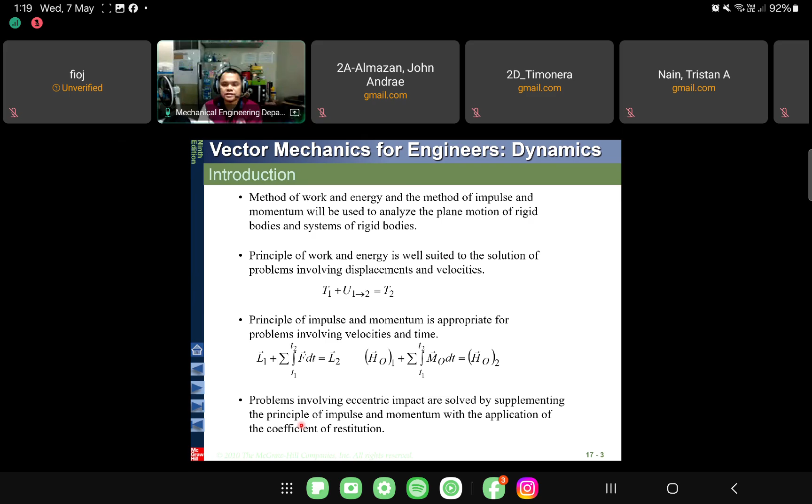So let's start with the principle of work and energy for a rigid body. It is well adapted to problems involving velocities and displacements, as I mentioned before. The main advantage is that you can isolate your work and kinetic energy since these are scalar quantities, to solve for your velocity as well as your displacements.

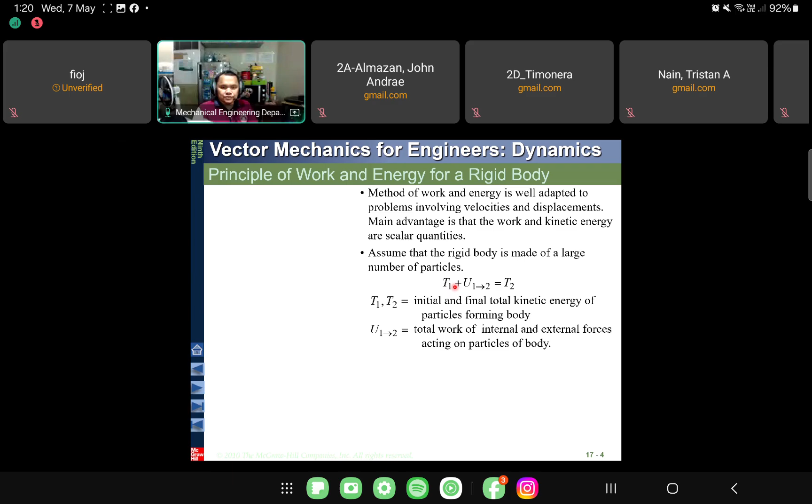So let's take for example, we assume that the rigid body is made up of a large number of particles. That is the concept of your rigid body, it's made of a large number of particles. Now, your principle of work and energy: your initial kinetic energy plus your work from point one to point two is equal to your final total kinetic energy. Let's assume this one.

How about what are the different forces to be considered? In this case for your rigid body, it is the internal and external forces acting on particles of the body. Let's talk about the internal forces. The internal forces between particles A and B are equal and opposite, as shown here.

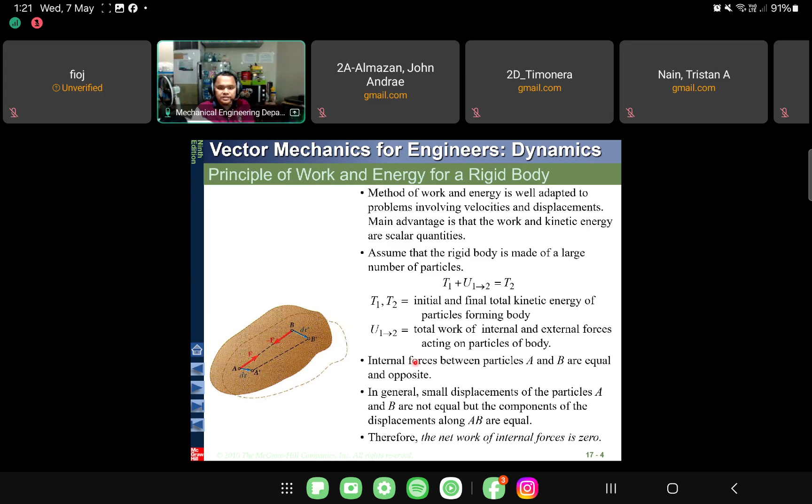So that means, in general, small displacements of particles A and B are not equal, but the components of the displacements along AB are equal. Based on this, we can say that the net work of internal forces is zero for the different particles in your rigid body. That's why when we are considering the principle of work and energy, we focus on the total work of the external forces acting on particles of the body. The net work of internal forces is zero based on these arguments.

Then let's talk about the work of forces acting on a rigid body. We have F times your distance from point one to point two. So we consider the net work of two forces and their moment during a displacement of their points of application. For example, you have this F and negative F, and the moment during this. This gives us work equal to F times dr1, this distance, minus negative F times dr1, plus F times dr2, this dr2 distance.

So summation of this gives us zero. We have F dr2, or equal to ds2. We have F r d theta. This gives us F r is your moment. So this means that the work from 1 to 2 is equal to M times theta 2 minus theta 1, where M here is your moment.

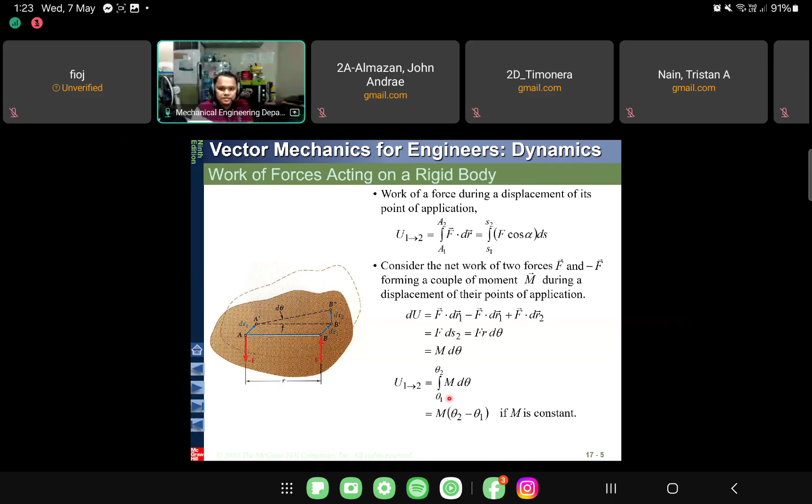Then how about forces acting on rigid bodies which do no work? Similar to particles, these applied forces do not do work either. First is forces applied to fixed points, so reactions at a frictionless pin when the supported body rotates about the pin — the work here is zero.

Then we all know forces acting in a direction perpendicular to the displacement. If your motion is going to the left, then the force acting is perpendicular, going upwards, that's 90 degrees. So that force does zero work on the system.

Other examples: reaction at a frictionless surface to a body moving along the surface. That's the reaction. Let's say for example there's a plane there with a roller support, so the reaction at your roller support is on the y-axis, but your motion is going to the left or right. So that reaction doesn't do work on your system. And also the weight of a body when its center of gravity moves horizontally — it's very obvious that your body moves horizontally but your weight is always vertical, going downwards, so that weight does no work on your system.

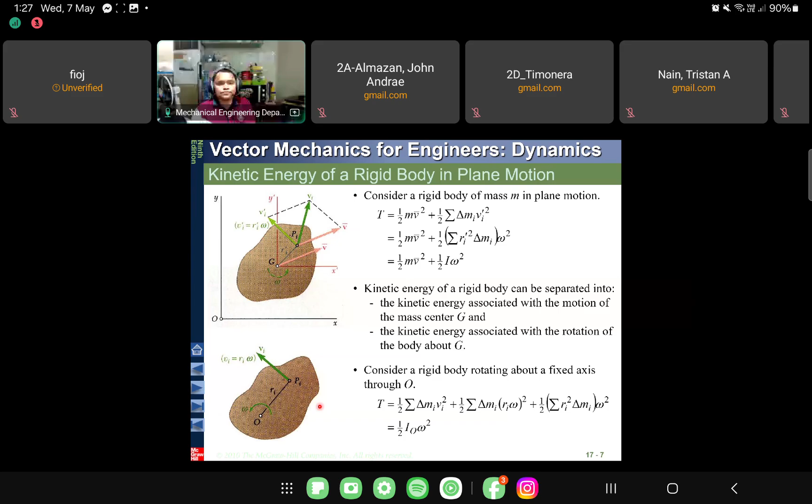Next, for systems of rigid bodies: when we are faced with problems involving systems consisting of several rigid bodies, we can apply the principle of work and energy to each body, and also to the entire system, the principle of work and energy.

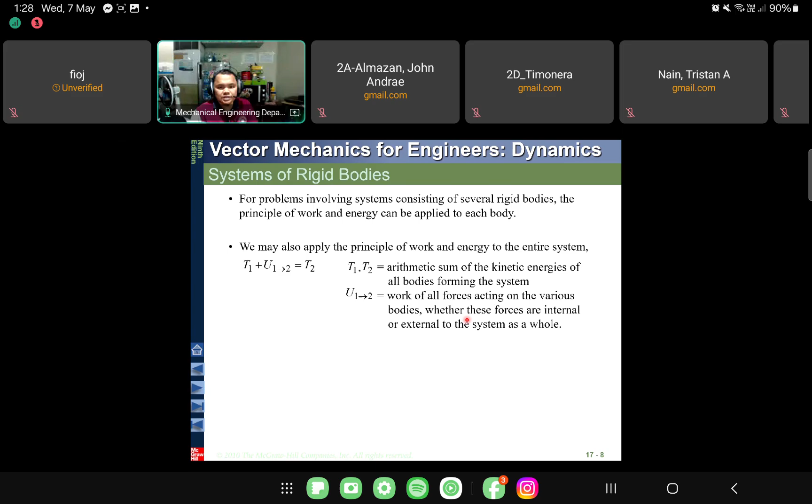So how are we going to do this? We have: kinetic energy initial plus work from 1 to 2 is equal to the final. T1 and T2 are the arithmetic sum of the kinetic energies of all bodies forming the system. For work from 1 to 2, this is the work of all forces acting on the various bodies, whether internal or external to the system as a whole. So this is now considered as a whole.

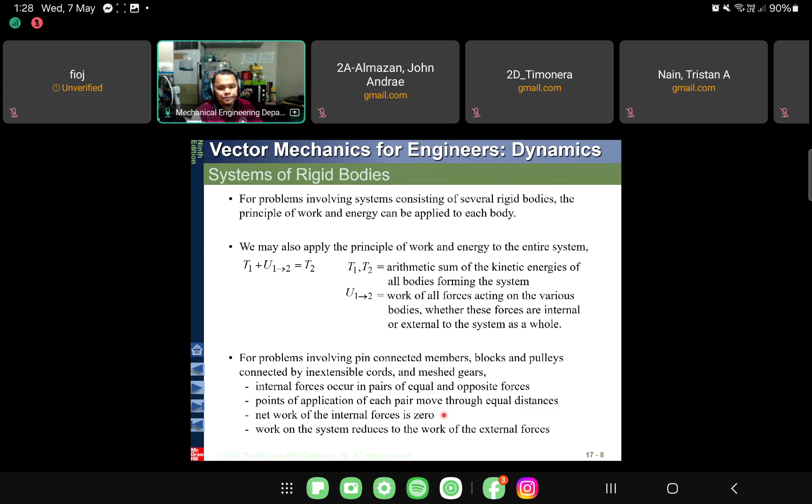For problems involving pin-connected members, blocks and pulleys connected by inextensible cords, and meshed gears, the internal forces occur in pairs of equal and opposite forces, similar to what you learned in statics. The points of application of each pair move through equal distances, so the net work of the internal forces is zero. Thus the work on the system reduces to the work of the external forces.

So how can we apply the conservation of energy to rigid bodies? This gives us: initial kinetic plus initial potential is equal to final kinetic plus final potential energy.

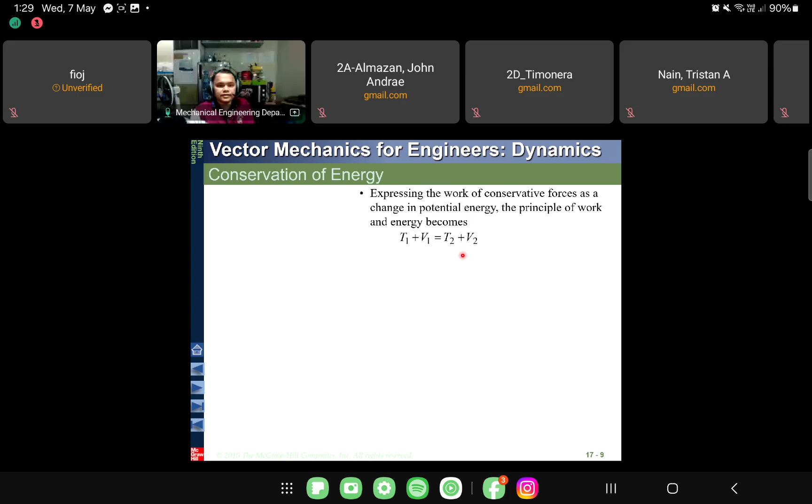Let's consider the slender rod of mass m, supported at A and B, with mass m and center of gravity G, with a certain length L. The motion is: B goes downward while A moves to the left. That's why you have the linear velocity of the rod going here, while the angular velocity will be here.

So let's try to determine the angular velocity as a function of the angle theta. T1 is equal to 0 for this, since it starts from rest, and our datum line is here, so our potential energy is 0.

So T2, what is your T2 here? The kinetic energy at this point, down below. Wait a moment. Listen to me. You dropped this. Are you still alive there? Yes, sir. Yes, sir.

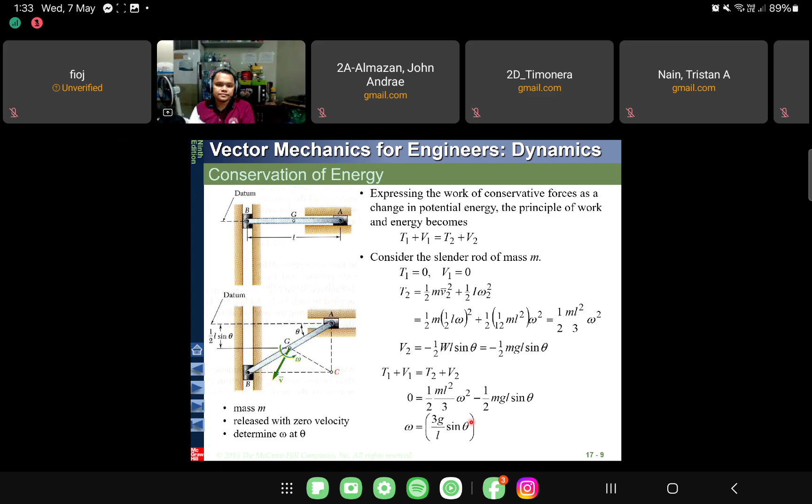Going back to the conservation of energy principle, you have T1 plus V1 equals T2 plus V2. These are zero. So we substitute T2 and V2, which gives us the angular velocity in terms of theta: angular velocity squared is equal to 3g over L sine theta.

Last concept: power. Power is the rate at which work is done. For a body acted upon by force F and moving with velocity, you have force times velocity.

For a rigid body rotating with an angular velocity and acted upon by a couple of moment M parallel to the axis of rotation, your power can be expressed in terms of your moment times your angular velocity.

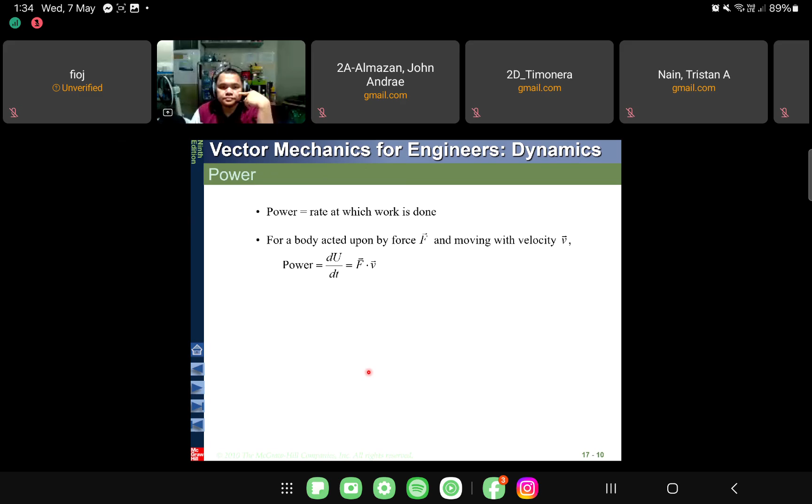Let's proceed to the sample problems. Here we have a drum and a flywheel setup. The moment of inertia for the system is 10.5 pound-feet second squared, the radius is 1.25 feet, and the weight of the block is 240 pounds.

The bearing friction is equivalent to a couple of 60 pound-feet. At the instant shown, the block is moving downward at 6 feet per second. The question is to determine the velocity of the block after it has moved 4 feet downward.

Considering the system of the flywheel and block, the work done by the internal forces exerted by the cable cancels, so the net work of the internal forces is zero. The velocity of the block and the angular velocity can be related by this relation: your linear velocity is equal to r times your angular velocity.

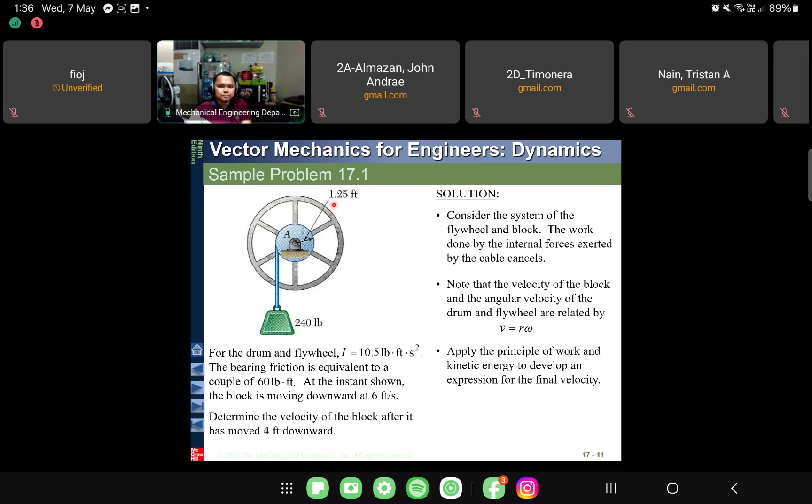Express already the different parameters in your diagram: you have your weight here, your acceleration for your flywheel both in the x and y, and you have your moment here.

So we have V1 at 6 feet per second, then we are solving for V2. It's better here since we are talking about changes in the system, that's why you need to give the diagram of the initial state for comparison, and also the diagram of the final state, so that solving becomes easier.

Okay, so let's look at what we're looking for. We are looking here for the final velocity after the block moves down by 4 feet. So this is the diagram I'll be looking for in your solutions.

So velocity of the block and the angular velocity of the drum, we have this relation. Your linear velocity is equal to r times your angular velocity, which gives us your angular velocity is 6 over r which is 1.25. Your angular velocity is 4.80 rad per second.

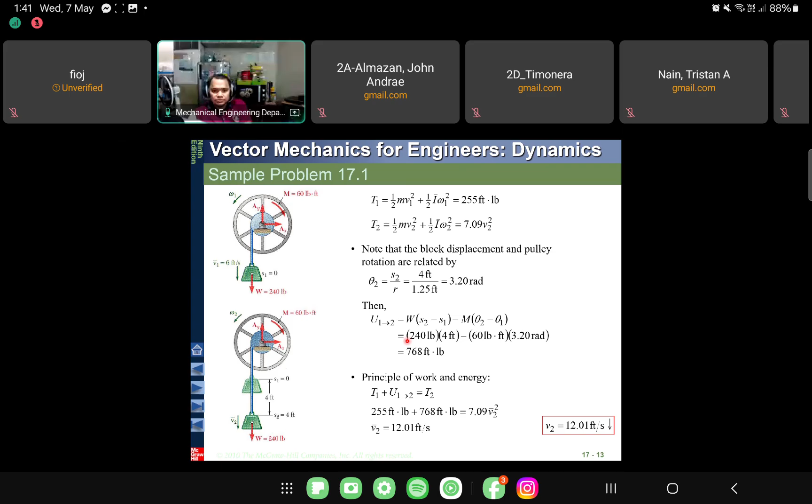So that's how you isolate it. What you're looking for in the problem is the velocity, the final velocity. So you need to isolate your kinetic energy. You can express your kinetic energy in terms of your final velocity, which is this one.

Any question? So far, none yet. Okay, sir.

Okay, so let's proceed to another sample problem. So you have here two gears, gear A and gear B. This system is at rest when a moment of m equal to 6 Newton meter is applied to gear B.

So the question: neglecting friction, determine the number of revolutions of gear B before its angular velocity reaches 600 RPM, and the tangential force exerted by gear B on gear A.

Okay, so take note, for the number of revolutions, you can use your angular velocity to solve for your number of revolutions. Then for the tangential force, you can apply work-energy and isolate your work to get your tangential force.

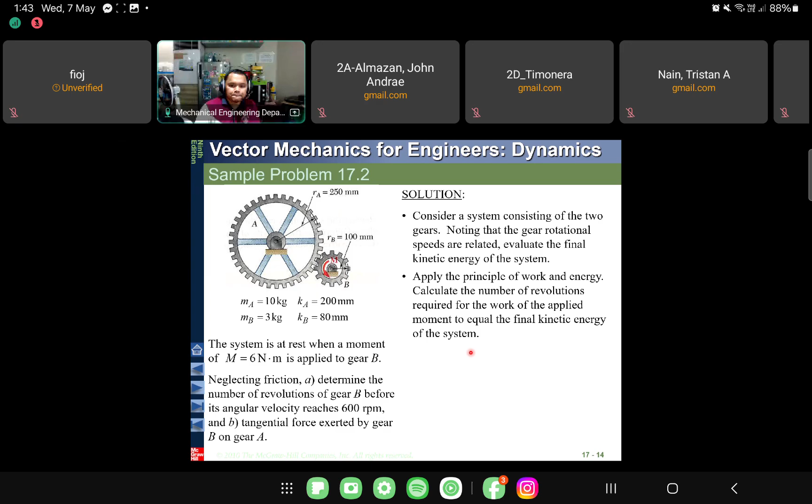So gear rotational speeds are related. Evaluate the final kinetic energy of the system. Then we apply the principle of work and energy. Okay, so this is your diagram, this is just a simple one.

You have your angular velocity for B and your angular velocity for A. Since your B is moving counterclockwise, then your A here is moving rotating clockwise.

Solving for your angular velocity for B, since we want it before it reaches 600 RPM, we use 600 RPM times 2 pi rad per revolution over 60 seconds per minute. This gives us 62.8 rad per second.

And your A, that is equivalent to your angular velocity for B times your RB over RA, this is the relation to your radius. So we have angular velocity for A is 25.1 rad per second.

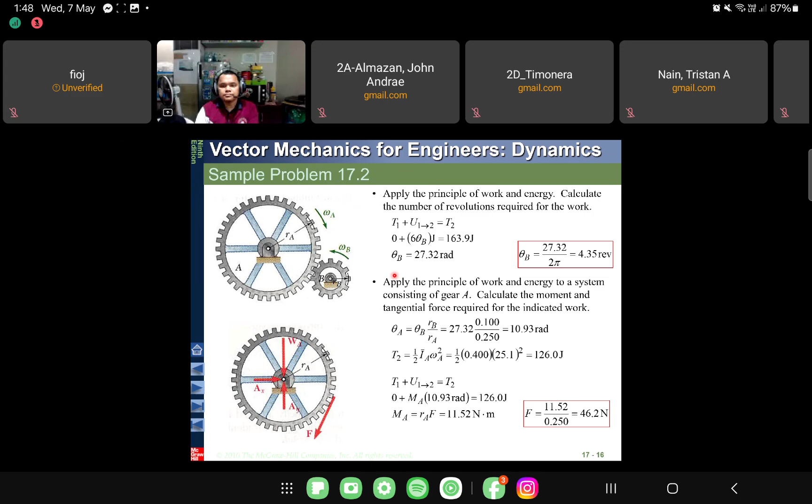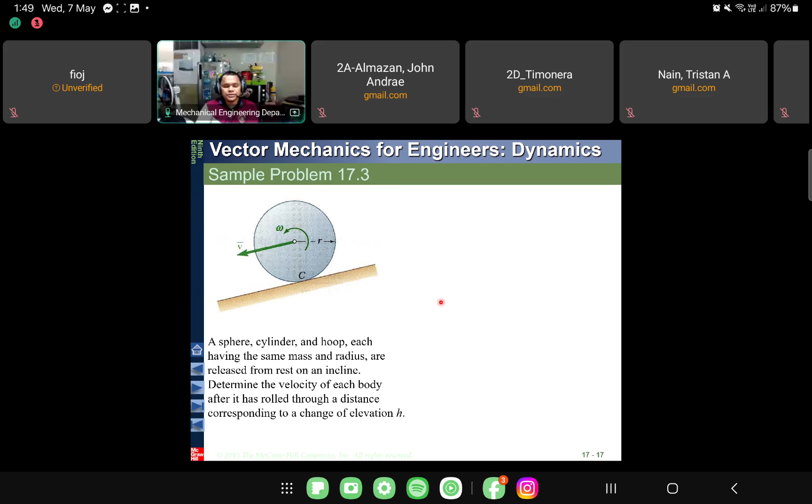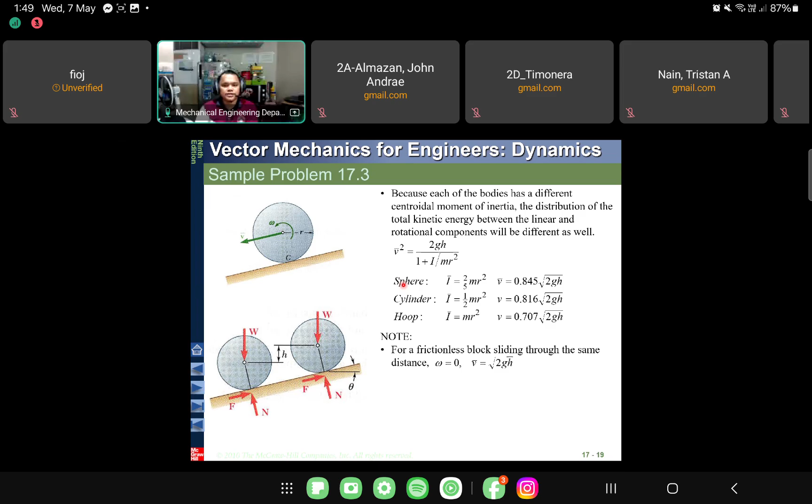We have other problems here. Just try to read these in your book and understand their solutions as well. It's the same concept repeated: principle of work and energy, where your kinetic energy is composed of your center of gravity motion and your rotational motion. Again, don't forget the rotational motion.

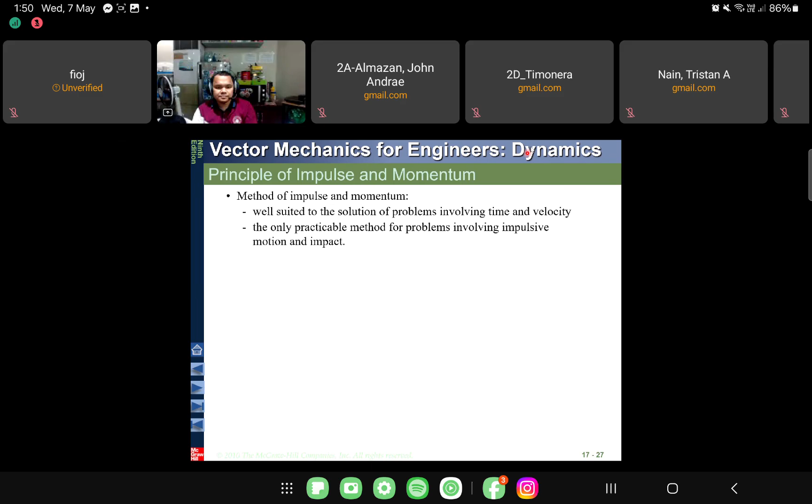So now let's proceed to principle of impulse and momentum. How are we going to apply this to rigid bodies and systems of rigid bodies? As mentioned before, we use the method of impulse and momentum when solving problems involving time and velocity.

Why time? You can isolate your impulse, that is force times time. And velocity lets you isolate your momentum, that is mass times velocity. So this is the only practicable method for problems involving impulsive motion and impact, the method of impulse and momentum.

So what is this principle of impulse and momentum? It says that your initial momentum on your system plus the summation of the impulse on your system is equal to the final momentum of your system. That is your method of impulse and momentum.

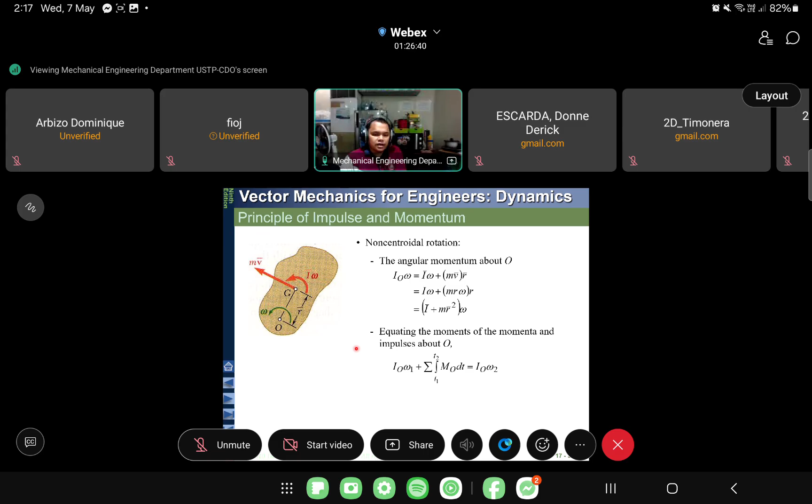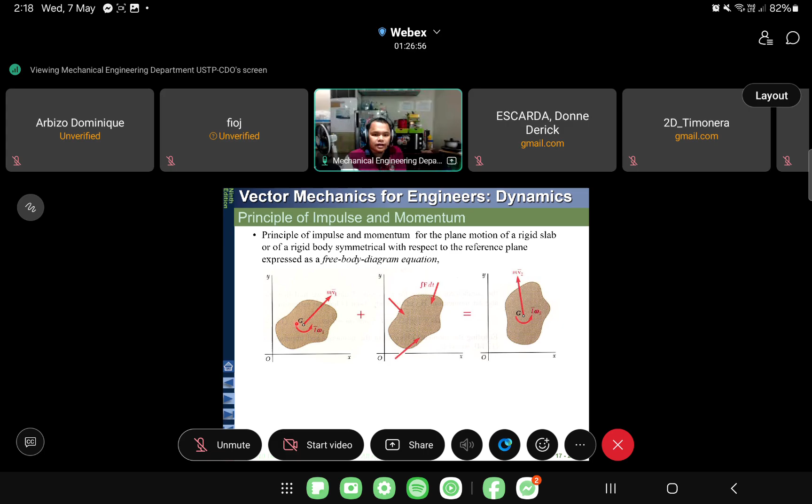So the free body diagram shows your linear velocity - sorry, the mouse lagged. So, linear velocity and your couple. Since it has angular velocity, it's rotating, that's why you have here your couple.

So, this time, a uniform sphere of mass m and radius r is projected along a rough horizontal surface with a linear velocity v1 and no angular velocity. So, the coefficient of kinetic friction is mu k. Determine the time t2 at which the sphere will start rolling without sliding, and the linear and angular velocities of the sphere at time t2.

So, apply the principle of impulse and momentum to find the variation of linear and angular velocities with time. Then, we relate the linear and angular velocities when the sphere stops sliding by noting that the velocity of the point of contact is zero at that instant.

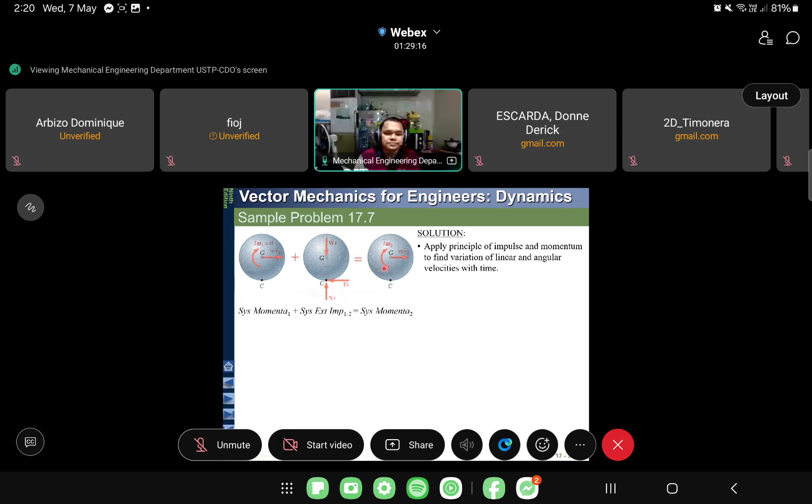Okay, then your impulse. What are the different forces? You have your frictional force, that is your Ft, and you have your normal force, that is your Nt, and the weight of your sphere. Then equal to the final momentum, which can be expressed as linear momentum and your rotational moment couple. Apply y components: Nt minus Wt is equal to 0, so your Nt is equal to Wt. So your normal force is equal to mg.

Summation of x components: mv1 minus Ft is equal to mv2. So Ft, frictional force, can be expressed as mu k times N times t, so mu k N, that is mg times t. Your velocity 2 can cancel out your mass, and can be expressed in terms of v1 minus mu k times gt.

Okay, so moments about G. What are the different forces that have moment about G? You have your Ft, that is Ft times r. This is positive since it will go clockwise. And then equal to positive IW equal to I times angular velocity 2.

Wait, the mouse lagged. So your Ft times r can be expressed as this: mu k times mg, that is your Ft, your frictional force. Then Ft times r, that is equal to your moment of inertia, 2/5 mr squared for your sphere, times your angular velocity 2.

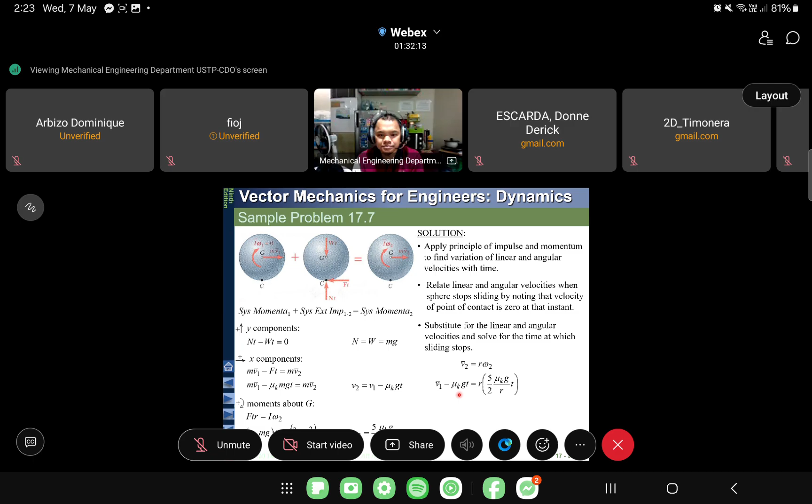Which is 5 over 2 mu k g over r times t. So simplify, this gives us t is equal to 2 over 7 v1 over mu k times g, since you can simplify it in terms of time. So this gives us 2 over 7 v1 over mu k times g. So we have our time as a function of v1.

And next is substitute for the linear and angular velocities, evaluate them at that instant. So at this time, what are the linear and angular velocities? So V2 is equal to V1 minus this, which you were able to solve.

Simplify, that is 5 over 7 V1. Cancel out this one, cancel out this one. So where did this come from? This is V2 minus, from summation of x components, remember V2 is equal to V1 minus mu k times gt.

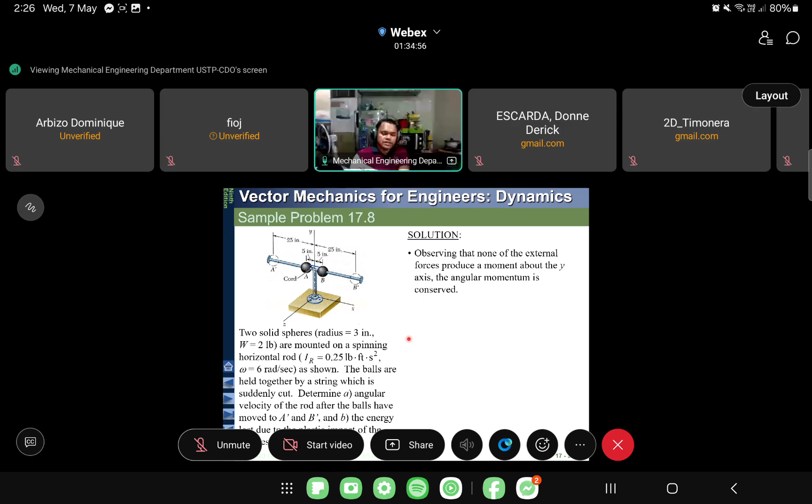Okay, so let's continue. Try to solve this problem on your own. Check this problem in your book. Same thing, just apply the principle of impulse and momentum.

So last topic is on eccentric impact. We already have an understanding of this one in central impact. We are concerned about the period of deformation and period of restitution.

So here we introduce the coefficient of restitution, which is your period of restitution over your period of deformation. Okay, so this can also be expressed as this one.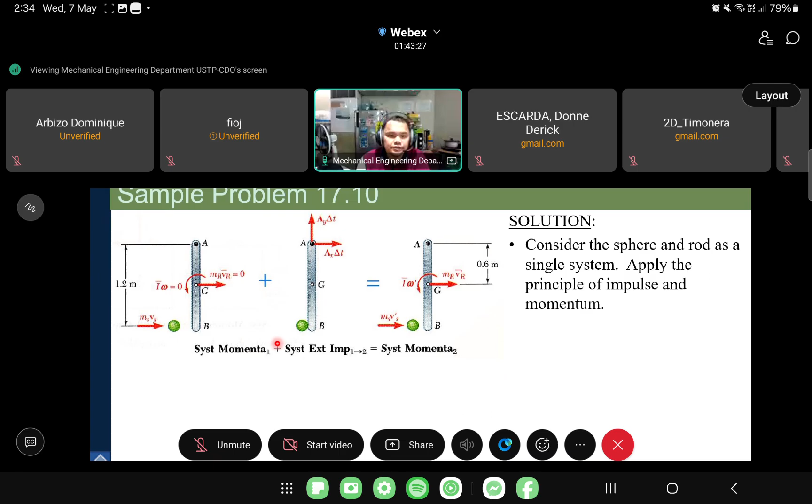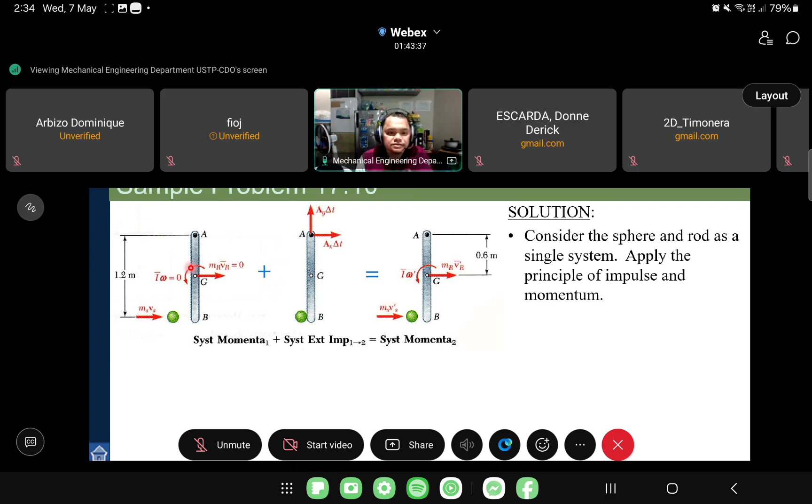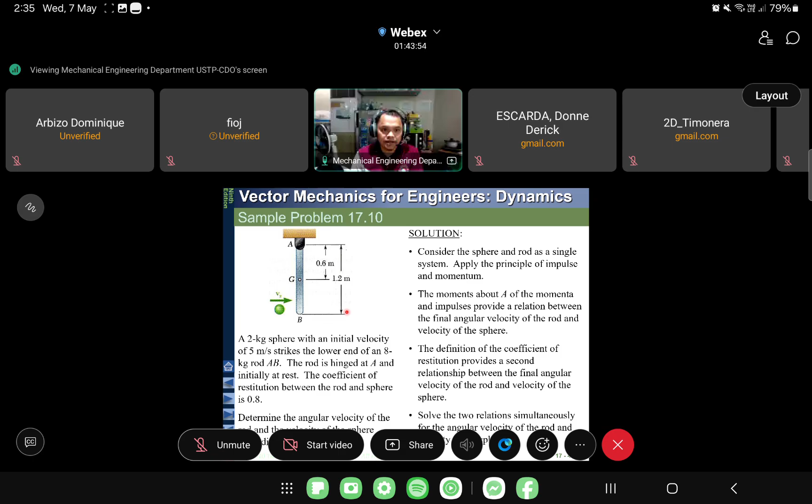So this is your free body diagram. Never forget this free body diagram. We are now considering the system as a single system, your sphere and your rod. So you have your initial system: MS·VS for your sphere, and the rod at rest, so initial momentum and initial moment couple is zero, zero. Plus your system impulse: the force here is your reaction at A, which is pinned, so you have Ax and Ay, times delta t.

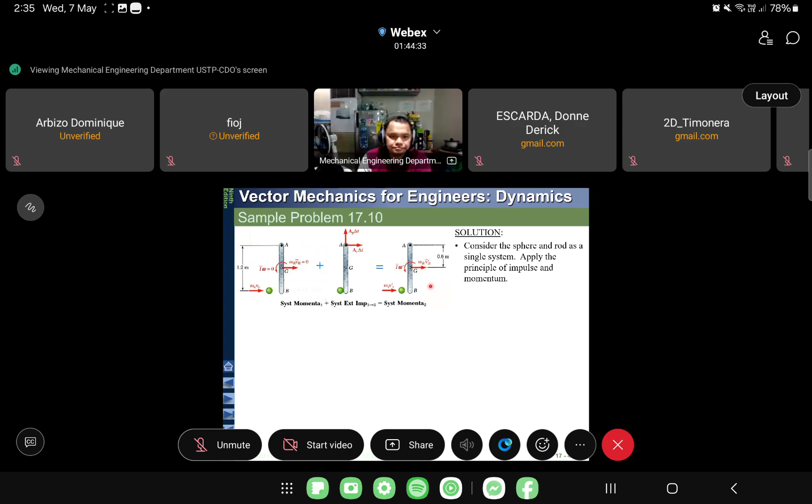And you have here your final, no? You have your MSVS final, then you have your MRVR final, and you have your I final angular velocity.

So moment about A, to cancel AY and AX, you have MSVS times 1.2. This is 0. Then you have MSVS final times 1.2 plus MRVR times 0.6 plus I times W. So here, VR is equal to RW equal to 0.6 meters times W final angular velocity.

Then your I is 1 over 12 ml squared. You have 0.96 kilogram meter squared. So this gives us the following. Then you have here the final velocity sa sphere, and you have your final angular velocity. So this is equation 1.

So to generate equation 2, use the relative velocities by using the definition of your coefficient of restitution. So VB minus VS is equal to E times VS minus VB.

So using this one, substitute values, you have 1.2 times final angular velocity minus Vs is equal to final velocity sa sphere is equal to 0.8 times change in velocity Vs minus Vb. So that is 5 meters per second.

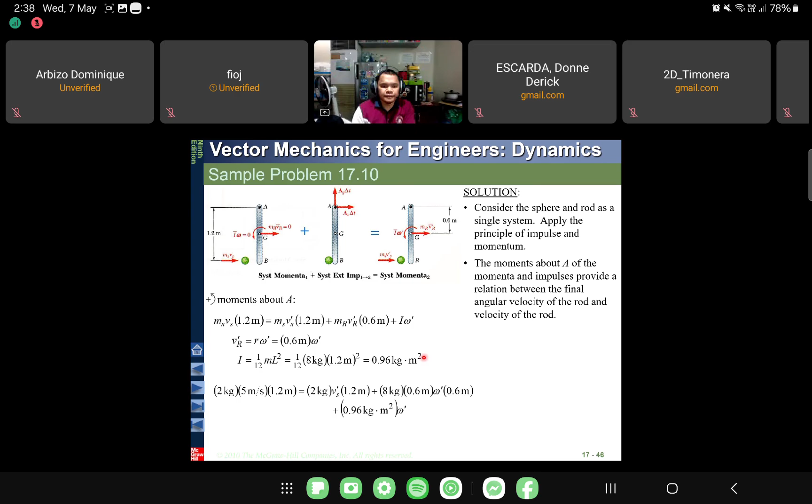Any question? Wala? So kung namo ang free body diagram, dali na lang. Pagkuha sa imong moments and then apply ang coefficient of restitution para ma-relate nimo ang mga velocities to solve for the unknowns, which is your final velocity sa sphere and final angular velocity sa rod.

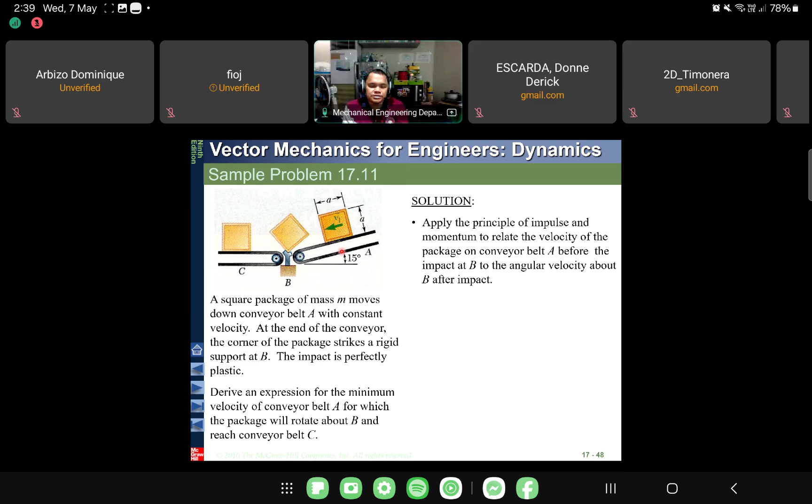So try to check this problem sa inyong libro. This is also using principle of impulse and momentum. Mora gyapon na siya. So if you have this free body diagram, then makita ninyo ang mga moment arm. So dali na lang gina pag-solve.

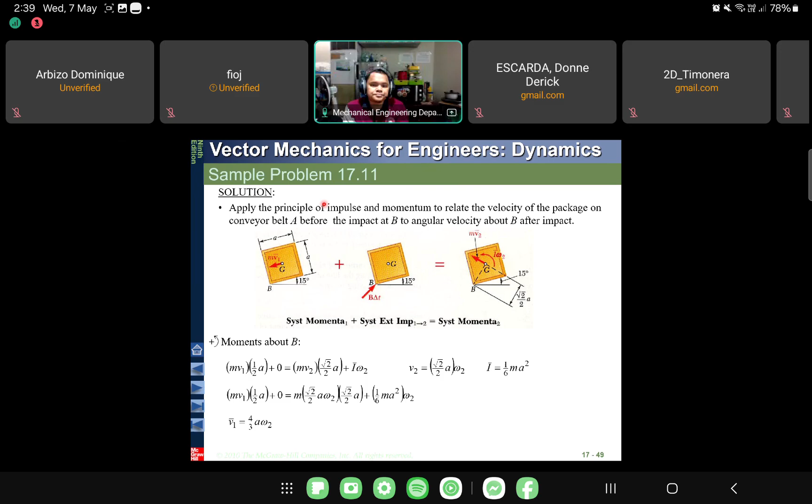Okay? Any question? Wala pa ko na? Wala na, sir. Wala na po, sir.